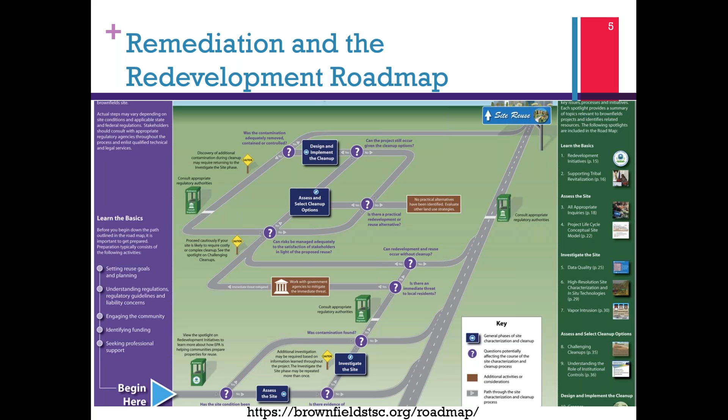So before we get into the technologies, we have to figure out first why you need to know about these technologies and what roles local government plays in these technologies. Now, unless your brownfield site has immediate environmental concerns, the reuse of a property will drive the remediation needs. This chart, created by the EPA Brownfields team and available on the Brownfields Roadmap page, is a schematic of how remediation and redevelopment play out on the site. It's intuitive, but maybe a bit complicated to follow. So we created an oversimplified version of this chart on the next slide.

All right. Okay. That looks pretty simple. So first we start with the site. Please note that this is an oversimplification for illustration purposes only. This slide does not discuss voluntary cleanup agreements, funding, community outreach, or other steps in the remediation and redevelopment process. For most sites that we redevelop and for which we want to evaluate whether it has environmental concerns, the first step is a phase 1 or other paper document or research on the environmental history of a site. If a phase 1 reveals potential concerns on the site, such as documented or telltale signs of past use for manufacturing or industrial purposes, then most consultants will recommend that a phase 2 be conducted.

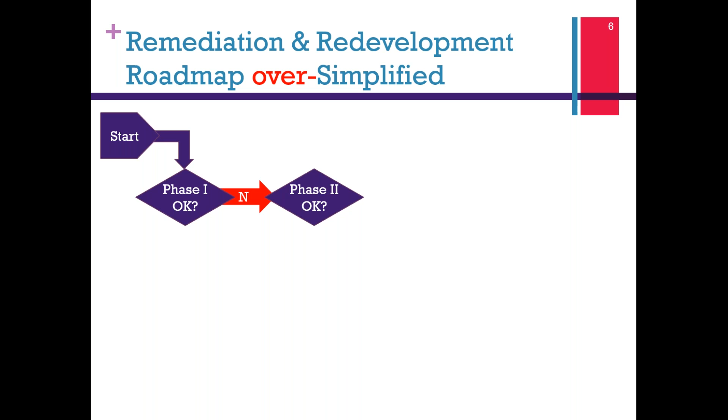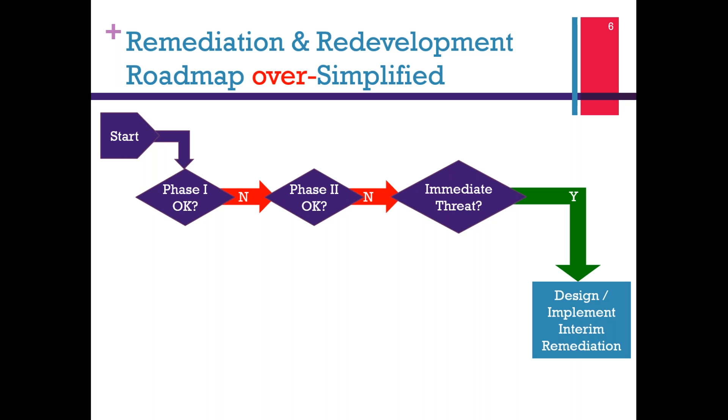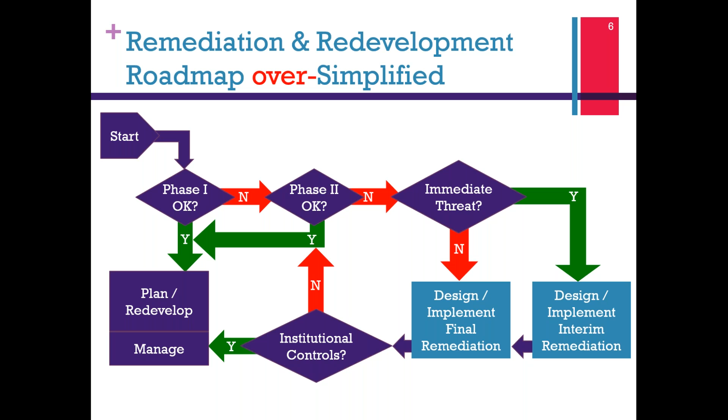If a phase 2, which is actual soil, groundwater, or soil vapor sampling on the site, is conducted and reveals an immediate threat from contamination, it is usually reported to the environmental regulator, who may require interim measures to control an ongoing release of contaminants. As Mark and Elizabeth will note, institutional controls may be needed if contamination is left in place. Institutional controls include engineering controls such as caps and long-term monitoring, and administrative controls such as deed restrictions that may be part of a remedy. If institutional controls are not needed, then the project can be redeveloped after the site is cleaned up. If institutional controls are needed, then these will be managed as long as necessary to ensure that the environment and the public are protected from residual contamination.

Again, this is an oversimplification and for illustration purposes, but in this chart, we stress the principle of the treatment and which media they apply to. You will see that the principles are either physically removing the contamination or encapsulating it, and various treatment options on contamination that is in the soil, the groundwater, or soil vapor.

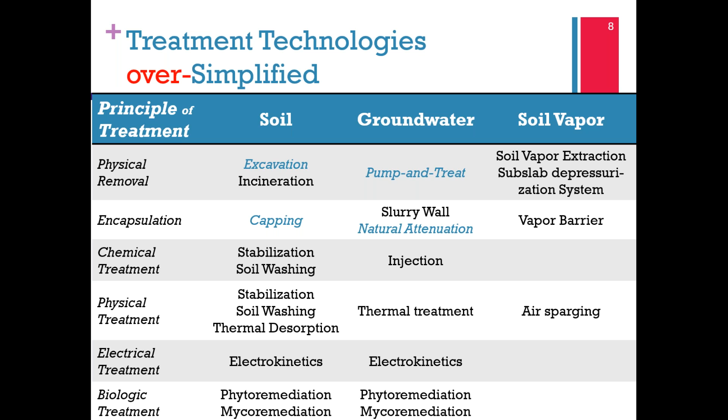Now, on this webinar, we will be addressing the technologies that are in the light blue, being excavation, capping, pump and treat, and natural attenuation. The other technologies are covered in many webinars that you can find on the web, including the CCLR webpage. So please visit it. And as a last note, which of these are considered green remediation technologies? Well, Elizabeth will go into that later.

Next slide. So without much further, I will hand it over to the first technology, which is asbestos in buildings. Now, asbestos is not in our chart because it refers mostly to contamination in buildings, but we found that most brownfield projects do involve some asbestos and lead issues. So, Mark, take it away.

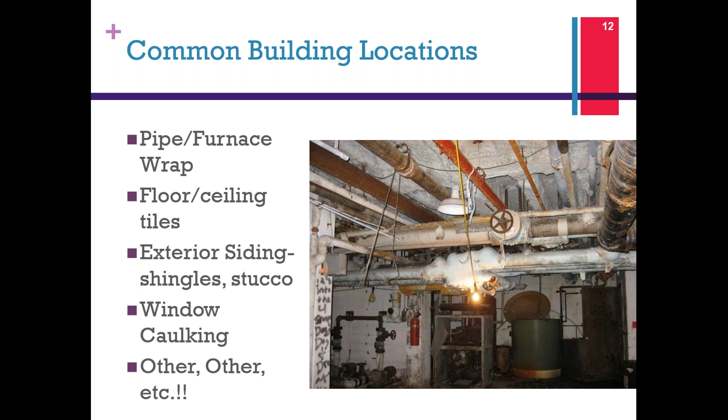But I do want to take a moment here to mention, because many of you might be in a position where you're engaging an environmental professional, and under brownfields you're tasked with doing a Phase 1 to meet ASTM standards. So just be aware, if you're putting out an RFP and you're asking that the contractor meet ASTM standards, it's worthwhile adding in that they are specifically going to be tasked with doing an asbestos survey and lead-based paint if necessary. And the reason for that is asbestos and lead-based paint is not required under the ASTM standard. So let's move on to the next slide.

So when does asbestos become a problem? Basically if it's in place, it's neatly wrapped, and it's not in a friable state. And in brief, friable means that the asbestos can crumble. But if the asbestos is wrapped up and not flaking off into the air or doesn't have that capability, you probably don't need to deal with it. It's the act of disturbing the asbestos either through renovation or demolition that could either render the asbestos friable or release asbestos to the air. It's those acts of disturbance that bring about the requirement to deal with the asbestos.

So under the guise of demolition, you are required, I want to say in most states, that if you are going to demolish a building or renovate it, you do need to look for asbestos. I have kind of a good news and bad news scenario here under the demolition. If you have a situation where the building is structurally unsound, where it's unsafe to go in there and remove the asbestos, the good news is that you could use brownfield money to demolish that building, whereas brownfield money usually is only limited to removal of the asbestos.

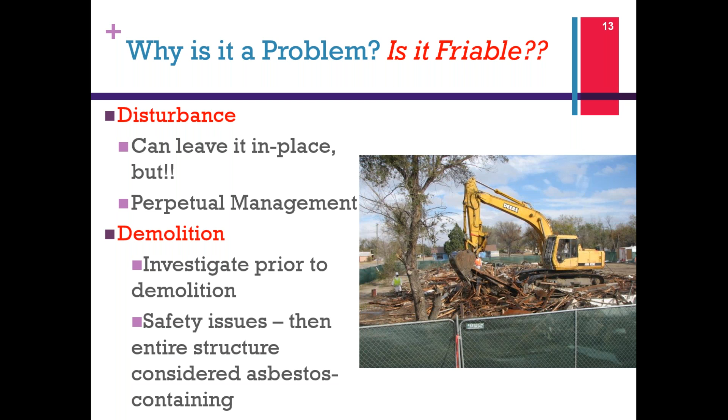But if you have to take down the entire building, you do need to consider that the entire building would be asbestos containing. So the bad news here is that even though you can use brownfield money to take the building down, you are going to increase the volume of your friable asbestos that you need to dispose of. So you're probably going to be raising costs there. So that's the good news, bad news story. Move on to the next slide, please.

So we're at the point now in asbestos remediation of considering, do we have to remove it or not to remove it? That is the question. Removal is costly, and as I alluded to before, it can have quite a range of costs, but removal is effective and it is a permanent solution. If you're in extremely rural locations, your transportation costs to a landfill that can accept asbestos, because not all landfills can accept it, might factor into your overall equation, and the number of landfills that you have access to will definitely factor in.

So you might want to consider managing it in place. It is a less expensive option. It does require a management plan. These management plans don't need to be complex, but they do need to show that you're on top of things and you will not be causing a release. You're monitoring it, and you're basically on top of it.

On the downside about managing it in place, if there is going to be a title transfer of the site, your buyer might not want to take on the liability of managing that asbestos in perpetuity. So there is a back and forth between removal or not, or managing it in place. So consider those factors when you're choosing your remedial option. Next slide.

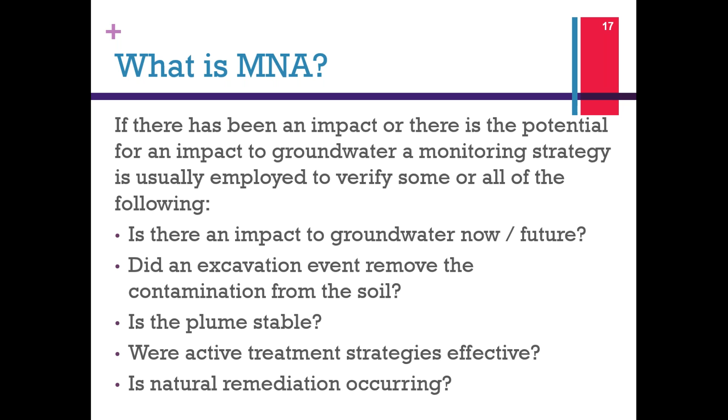And under MNA, you're also looking at demonstrating if natural remediation is occurring. You're looking for those indicator compounds so your regulator can verify that, yes, natural remediation is occurring. Next slide.

So in brief, there's probably numerous goals, but these are probably the most important from a regulator standpoint of a monitoring strategy. You want to demonstrate that it's okay, safe, and protective to leave this groundwater plume behind, and that houses that are down gradient, drinking water wells, or surface water are protected from the plume. Hopefully the plume is stable and not migrating. You want to demonstrate that not only is the plume stable, but with time you're going to see a decrease in contaminant concentration due to either attenuation or biodegradation.

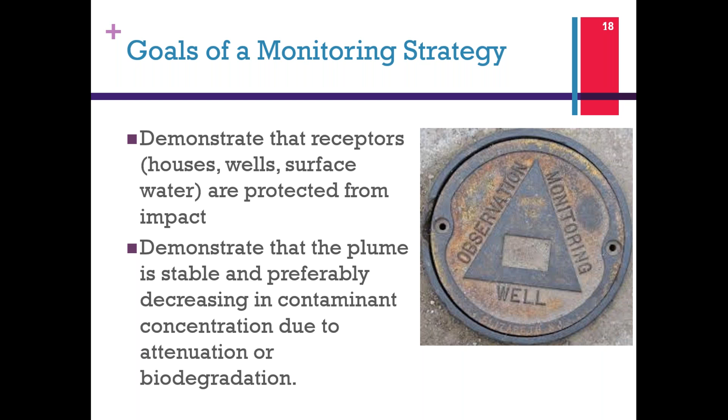So let's consider on the next slide advantages and disadvantages, and they're big here. In most cases, comparing MNA to an active treatment technology, especially if your plume covers many, many acres, monitored natural attenuation is less expensive. If you have a contaminant plume that has recalcitrant compounds, maybe such as metals, that are not easily treated with a standard methodology, monitored natural attenuation is probably going to be your best option.

On the disadvantage side, this is a big one, and again, most of us are in the brownfields arena, and uncertainty does not play well in the brownfields arena. So if you're dealing with a site and this plume becomes unstable for whatever reason, or if contaminant levels bump up, it's going to be a disadvantage to transferring title on that site.

And in brief, groundwater does not move very quickly, so it's going to be a long time before you know if the plume is stable or if it's going to be. So in brief, monitored natural attenuation is not a quick process. So that concludes my discussion of two technologies.

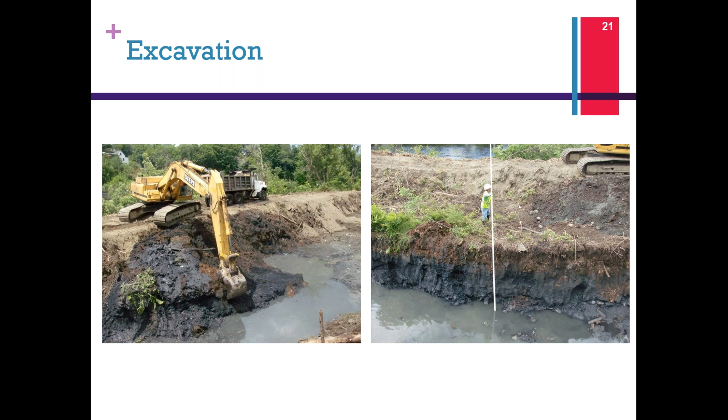But once you have that excavated area, there's a couple things that can happen. One is that the redevelopment project you're planning is going to have an underground garage or a basement or something like that, so you wouldn't need to backfill the excavation necessarily. Otherwise, typically, you're going to backfill it with clean material. And we definitely recommend verifying that this clean soil that you're putting in is clean, and you do that by sampling that material.

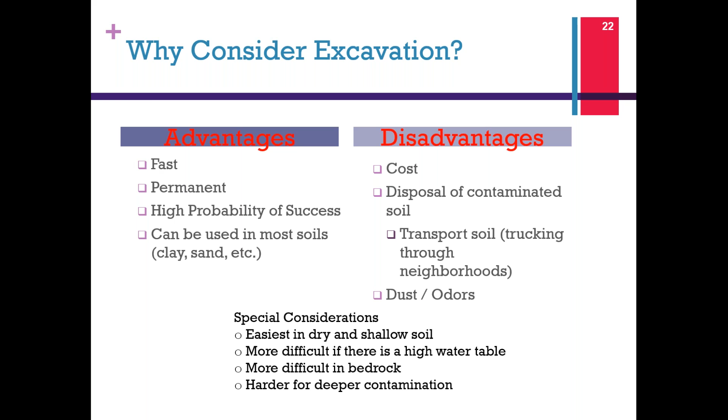Next slide. So next up is capping, but first I have a polling question for you.

Now, capping is often used at brownfield sites, especially because it is fairly simple, fast, and economical, but it does leave contamination at the site.

So with that said, do we have the polling question for this? I'm not seeing it, so maybe not. Here it is. Do you think capping is an appropriate remedial strategy, yes or no? So I'm going to give you guys a minute to answer that. But as you're answering that, I just want to give you the idea behind capping is that it does allow you to leave contamination in place at the site.

Yes, Elizabeth, and while people are answering, we have a question that came in on the other topic. Oh, on the soil excavation, yeah? Yes. While doing excavation, what other precautionary measures do you have to take? Well, it's going to depend on what your contaminants are at the site, but you might have air monitoring. You might have to keep dust down, usually you do that by spraying with water. Just general kinds of concerns that happen with any kind of construction excavation.

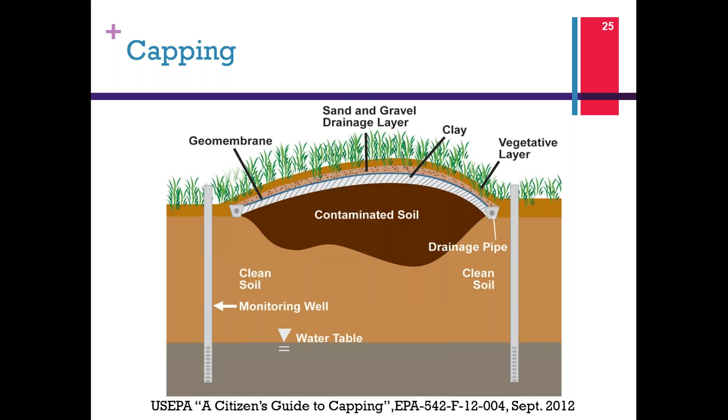When I say that it's low cost, the last thing we talked about was excavation. There you're paying to dig up the soil, you're paying to transport it off site. Here, all you have to do is really cover it. Like I said, it can be used with other technologies; in particular, you might be using it with excavation. So once that dirtiest dirt is removed, capping could be used on the rest of your site to prevent that direct contact with residual contamination.

If you're using that existing structure, such as the parking lot or a building foundation, it's going to save you a lot of money. If you're installing a simple cap, say a 2-foot thickness cap, it's probably going to run you about $100,000 an acre with clean soil. If you're looking at a cap more like that more complex one we had, you're probably looking in the neighborhood of $300,000–400,000 an acre for a thicker cap like that. There's a high probability of success.

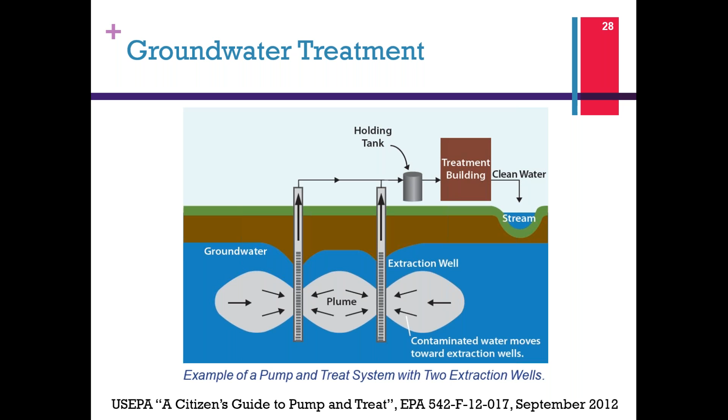Now, like I said, in addition to actually cleaning up the groundwater, the other goal here is often to just contain that plume. And again, that's done by pulling that groundwater into the wells through the pumping action. It's going to hopefully prevent it from flowing in the other direction, away from your site, away from drinking water wells or wetlands or streams or other natural resources. The next slide, please.

And again, you might have all kinds of different things in here, from carbon. When I say carbon, we're talking about the same stuff that's in your Brita water filter, and that's something that we use to treat groundwater. An air stripper is kind of what it sounds like, which is you're basically using air to evaporate the contaminants from the water once it gets in there.

So why would you consider it? Well, number one is because it cleans up groundwater contamination and it can prevent that spread of contamination. The probability of success, I would give it a medium. You're usually able to get your concentrations down, but oftentimes it's not enough to get it all the way to the regulatory standards, and you're probably going to have to combine it with something else like monitored natural attenuation.

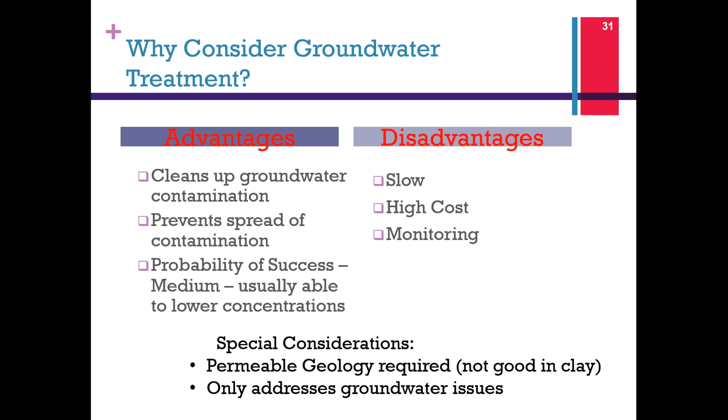I really want to make sure I share with you the concept of green remediation. And this can be used no matter what kind of cleanup technology you're using. It is the practice of considering all environmental effects of your remediation and then incorporating options to minimize the environmental footprint of your cleanup and minimize the adverse impacts it might have on the needs of the current and future generations. At the same time, green remediation is really also about maximizing efficiencies.

It can be done at any stage of your project. It does not have to cost more, and in some cases, it can be really easy to do. So, for instance, if you were excavating soil like we talked about earlier, you could consider using ultra-low sulfur diesel for the heavy equipment, and you could limit air emissions and greenhouse gases. In addition, you might want to have the contractors adhere to an anti-idling reduction program, right? So those are all pretty simple things you could do.

When you're planning your excavation, try and find the closest disposal facility, or even better, find a beneficial reuse for that excavated material. When you're working at the site, think of other things you might do. Maybe you have an existing office building there that you could use instead of having to bring a trailer out to the site. If you're doing a cap, could you use vegetation that's native to the area? Can you use vegetation for erosion control where practical?

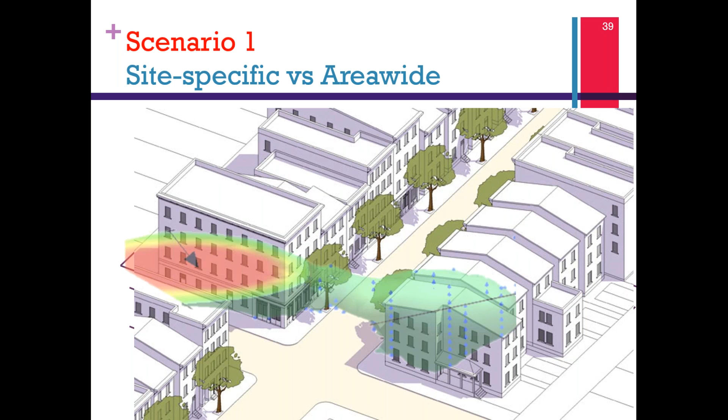And I think we're just scratching the surface here, which leads me to the next scenario. Here's a situation where you have a privately owned multi-building property with some historic or potentially historic buildings and some industrial tilt-ups. There's soil and groundwater contamination that affects some buildings, and lead and asbestos in all the buildings.

Now, for some of you who have been doing brownfields for a while, you're familiar with the term analysis of brownfields cleanup alternatives. These studies address a variety of cleanup options related to the cost and effectiveness of cleanup technologies. However, there are many other considerations that a local government would be interested in evaluating, including the land uses desired by the community, the possible uses of the buildings, timing of redevelopment, whether to get involved in the remediation or redevelopment of this site, and many other factors that stakeholders will bring up with the local government.

So with that, I'm going to hand it over again to Elizabeth and Mark to chime in very quickly on things that might pop up both in the remediation sense and in other factors that local government might get involved in. So Ignacio, I'm going to take a guess here. I'm looking at this fence around the building, and you said it's privately owned. It doesn't look like they're engaged in any remediation at this point. Maybe they're reluctant. Maybe the owner is considering basically just sticking their head in the sand and mothballing the site rather than deal with the contamination.

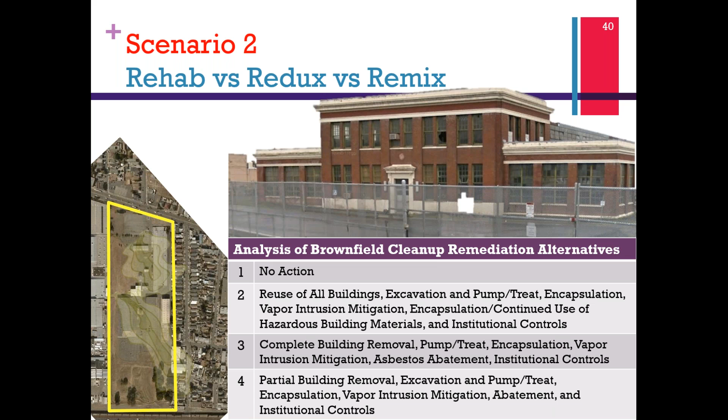Thank you. We have 5 minutes left, and I'm just going to bypass the third scenario, just to mention, though, that landfills, again, are a very common situation where you have to deal with interim and current uses, the productive use of it, how long they're idle. So that's a very common situation in communities where local government is often not just in the redevelopment side. They also have to deal with the remediation approaches and interim approaches.

So going on to the next slide, how can TAB help? Well, as you can see, Mark and Elizabeth and our teams are very knowledgeable in a variety of issues. We have engineers, planners, and people with redevelopment experience. So we can provide that technical assistance both in urban and rural areas. We can help identify funding and financing mechanisms and how to build partnerships. We have many workshops, and you saw a list of them earlier on. Connections to other EPA programs and connections to other federal agencies.

Again, the Brownfields program does not just deal with remediation and contamination. We deal with redevelopment, and that's our goal, because there are EPA and federal programs that assist with redevelopment of a brownfield.